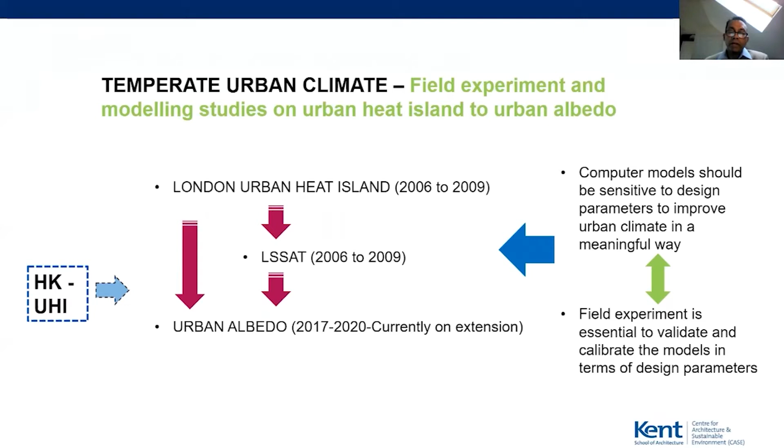Now, the London Urban Heat Island project was funded by EPSRC and it was carried out during 2006-2009. UCL was the principal investigator and Brunel was one of the research partners. I worked for Brunel University as a postdoctoral fellow.

However, the base data for this project came from research work done by Richard Watkins during 1999-2000. He measured the outdoor temperature in various locations of London using the British Museum as the focal point.

He followed a radial path in 8 directions to measure these points, and he used Langley as the reference point, which is shown in green here.

For measurement, he used Tinytag loggers, placed inside an aluminium shield, and these aluminium shields were mounted onto lampposts. He used a special telescopic pole to install the loggers as well as download the data.

Now, we repeated the measurement in these locations during 2007 and 2008. However, we didn't measure in all locations. We measured in 77 locations along the 8 directions.

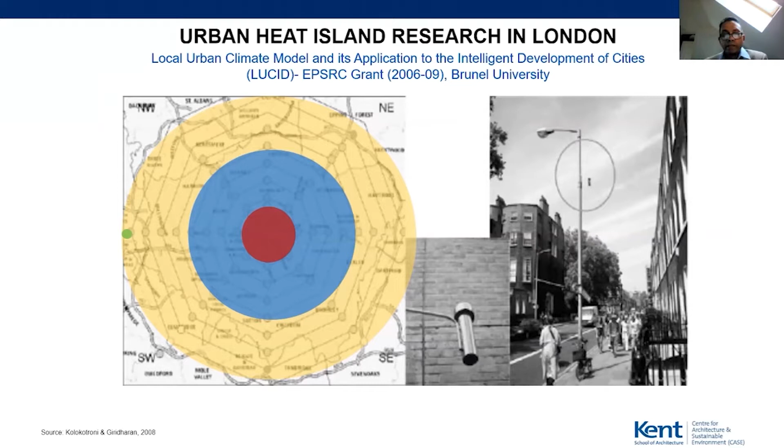For the study, we classified the locations into 3 geographical zones, mainly based on distance from the focal point, which is the British Museum, and density of the setting.

The geographical classifications are core, urban, and semi-urban. Core had 20 measurement points, urban had 24 measurement points, and semi-urban had 33 measurement points.

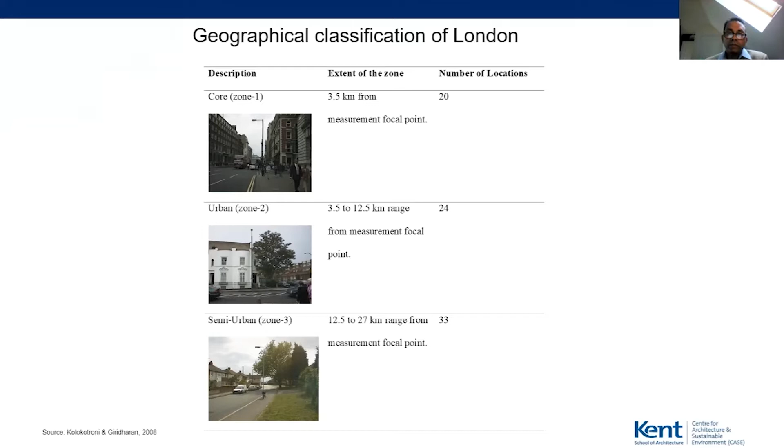For the purpose of analysis, we controlled the data in terms of geography and then disaggregated the data along the sky conditions and analyzed the hourly UHI trends.

In the core area, we found both during day and night there is UHI, however the nighttime UHI is very prominent. In the urban area, the prominency is similar both in day and night.

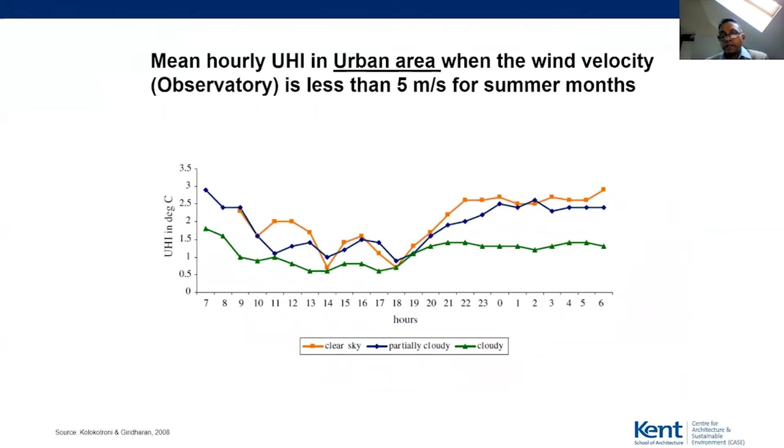But when you move to the semi-urban area, daytime prominency is much more than the nighttime.

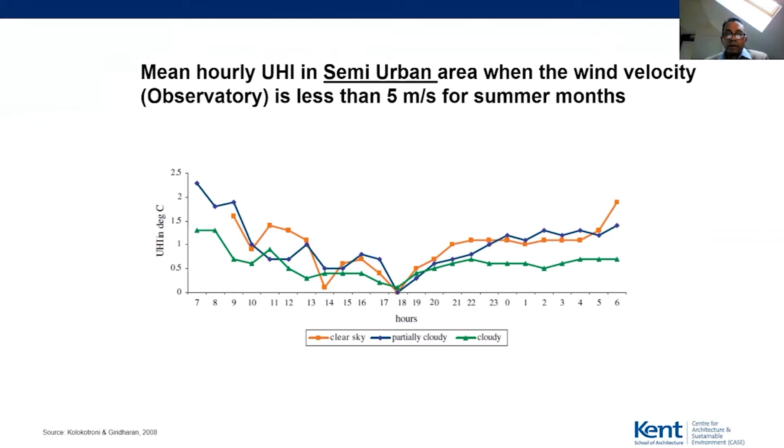Then we studied the changes in the outdoor temperature using on-site variables such as surface albedo, aspect ratio, thermal mass, green density ratio, plan density ratio, and fabric density ratio. For this purpose, we developed regression models controlling the sky conditions.

However, all 6 variables were behaving in line with the acceptable premises.

Then we modeled the nighttime. The R-squared values went up, so the models were very significant, and all 6 variables behaved in line with acceptable premises. This shows the 6 variables were good enough to explain the changes in nighttime.

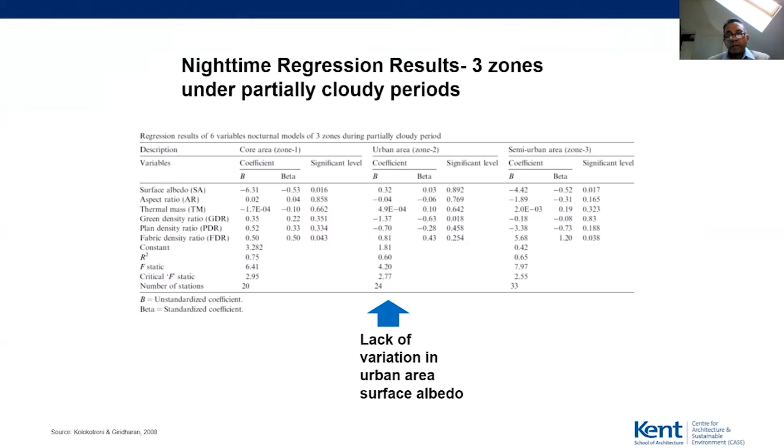Then we controlled the geography and carried out the analysis. Again, we found the nighttime models were very significant and all variables behaved in line with acceptable premises, except surface albedo in urban areas. This is largely due to lack of variation in surface albedo in urban areas, where you'll find mostly asphalt and concrete paving, so that is being reflected in the model.

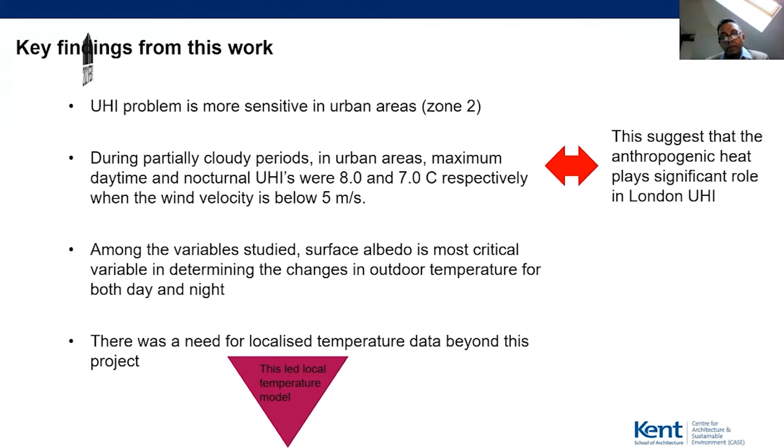Key findings from this work: the UHI problem is more sensitive in urban areas. During partially cloudy periods in urban areas, maximum daytime and nocturnal UHIs were 8 and 7 degrees respectively. This suggests that anthropogenic heat plays a significant role in London's UHI. The most significant on-site variable was surface albedo, and there was a need for localized temperature data beyond this project, which led to the development of London site-specific air temperature models.

For London site-specific air temperature models, we used the artificial neural network technique. Input parameters were air temperature, relative humidity, wind velocity, cloud cover, and solar radiation intensity, based on Heathrow weather data. Another input parameter was the on-site fixed air temperature of a specific site. We used the 2000 data to train these models.

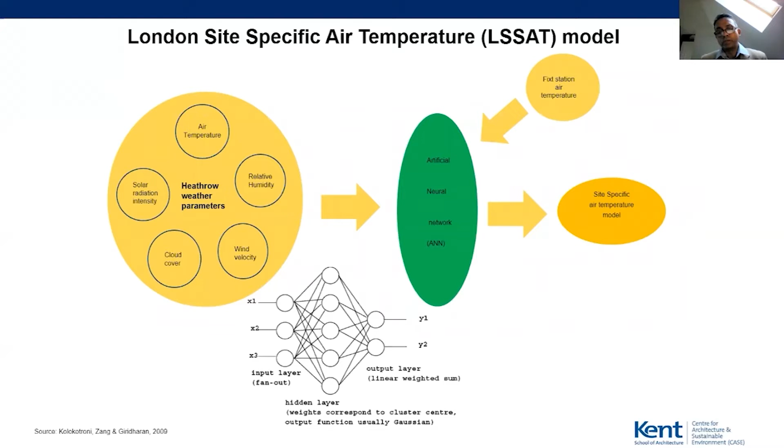The advantage of using a neural network is it has the capacity to randomly select data from the database and train the model, then use the balance data for calibration. For this particular model development, we used 70% of the 1999-2000 data for training and the balance 30% for calibration.

So one of the calibration graphs - we calibrated for almost all the sites, and this is one of the locations in the core area. You can see in 1999, the calibration alignment was very good, and even in 2000 you could see very high calibration.

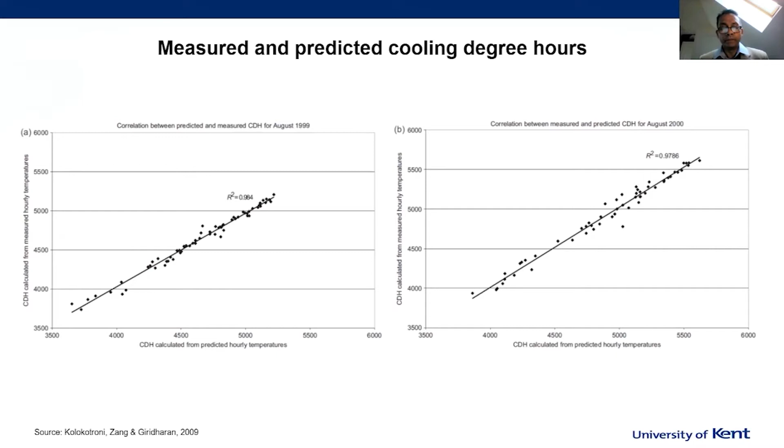We also predicted cooling degree days for 1999 and 2000, and we could see very good alignment. Then we predicted cooling degree days along the radial paths and tried to explain that in terms of on-site variables.

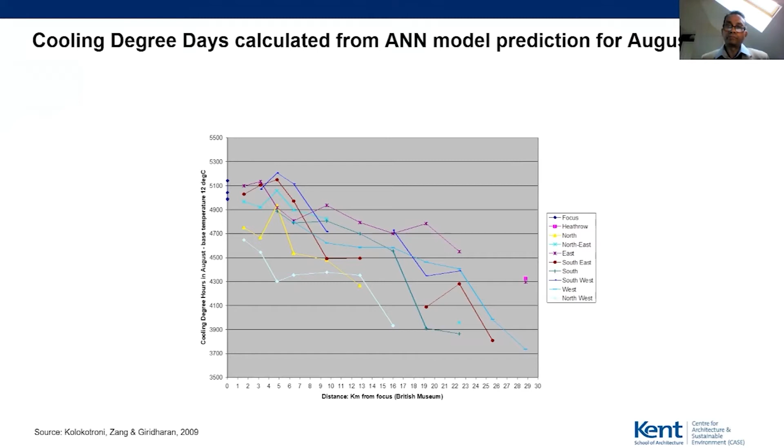The key takeaway from this work: the London site-specific air temperature models were capable of predicting hourly temperature. The accuracy increased for daily values. It is a good tool to work out local heating and cooling degree days. The inaccuracy sets in where urban variations are high, and again, surface albedo was one of those factors.

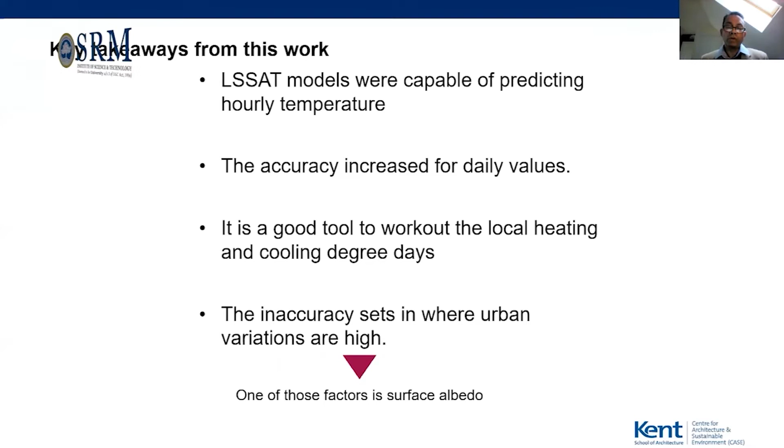These two projects led to the development of urban albedo. Urban albedo is slightly different from surface albedo. Urban albedo is a function of urban geometry, aspect ratio, surface reflectance, and so on.

Originally, this project was developed in 2009 when I was at Brunel, and we submitted to EPSRC. We had good reviews and went up to the last stage. However, we didn't get the funding. Then I moved to Loughborough, and I didn't have time to focus on this project. Then when I moved to Kent, I thought of revising and submitting the proposal.

When I revised the proposal, I took into account the comments given by the reviewers, because we had two excellent reviews for the first submission and one moderate review. So I took all those comments into account and revised the proposal. Especially, we strengthened the proposal in terms of material characterization by bringing in Bala Vaidhyanathan from Loughborough.

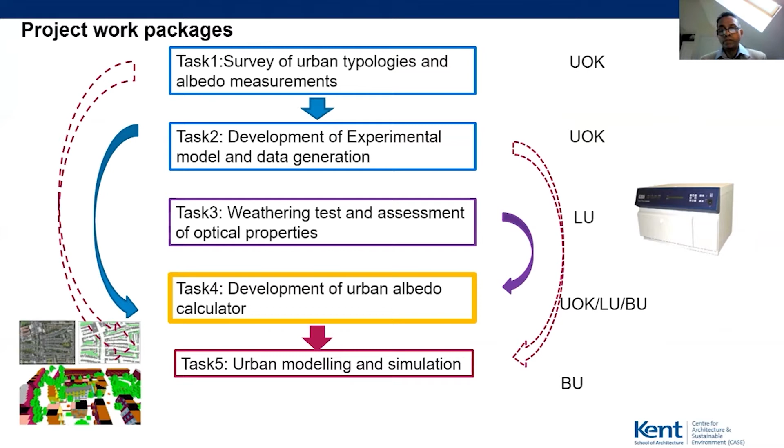Approach for University of Kent component: we carried out a site survey, and then we developed a 1:10 scale model covering a 100-meter radius of a UHI measurement point. So we selected the site from the work done by Richard Watkins. Then we validated the experimental model using the survey information. Then we developed a radiance model of the experimental site, and then we calibrated that model.

And then we subjected that model to various changes in terms of geometry and material. More precisely, we carried out sensitivity analysis to see whether the model is sensitive to various changes. And then the next stage is to develop a radiance model for the actual site, and then simulate various results so that we can generate data to develop indexes and validate the calculator.

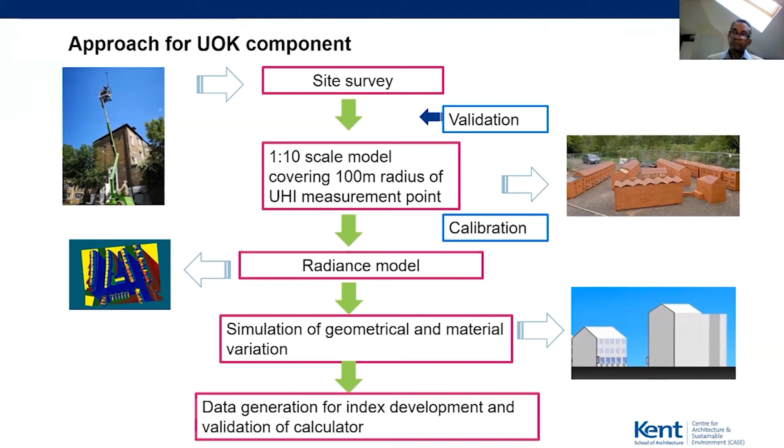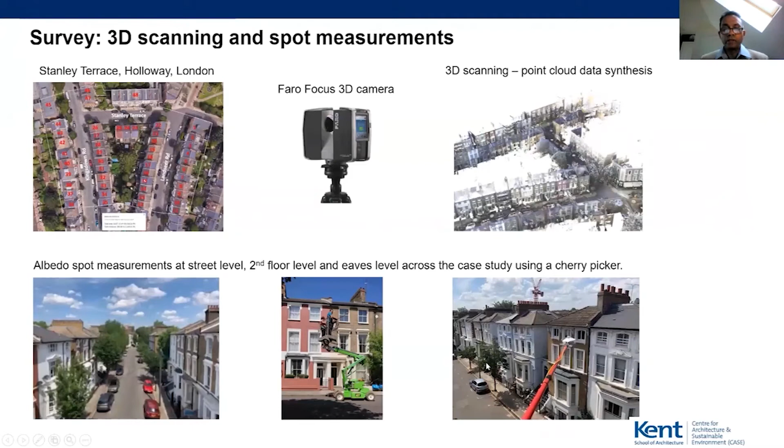The survey and scanning now. The 3D scanning was carried out for the actual site, and it was carried out using a Faro Focus 3D camera. What you see here is the point cloud data of the 3D scanning, and we also surveyed the site using a cherry picker. So we measured albedo at different levels.

Then we developed the experimental model in a northwestern location of University of Kent. We selected a site which was a sump in the past, but currently it is not in operation. The estates kindly agreed to give us that site, which you see on the right top image. However, we didn't realize that we had to get planning clearance to build a model. So all this process took about 6 months. Then eventually we did the setting out, and then we developed the model.

The base structure for the model was made out of plywood. Then we installed the pyranometers. The pyranometer that we use is Hukseflux. Then we are using a Campbell data logger to log the data. And now if you go to Google Earth, you could see the experimental site that you see in this image.

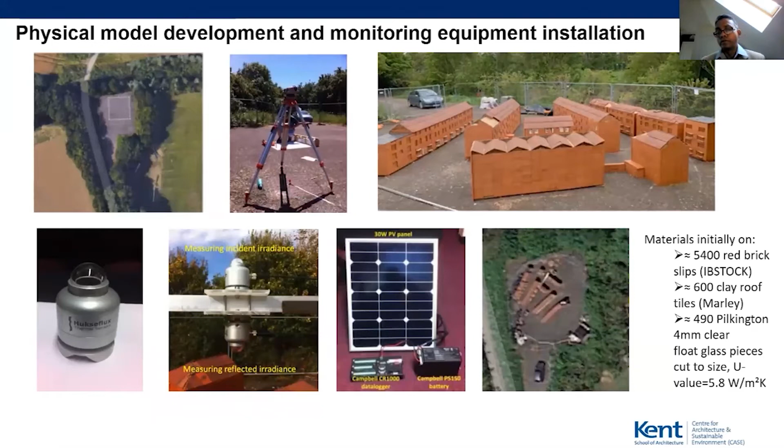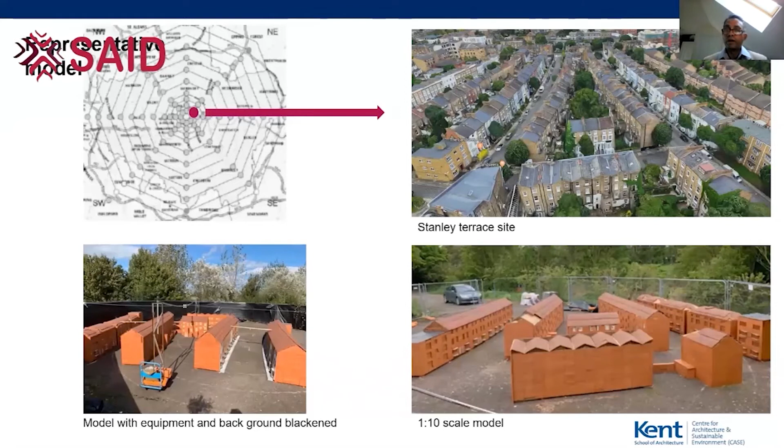This is the model for Stanley Terrace site. The model is reasonably representative of the context. And this is one of the locations which was measured by Richard Watkins for his UHI work. So we selected a site based on that, and we selected this because the variation in geometry is not complex, and second, the height is manageable, so that we can construct a 1:10 model.

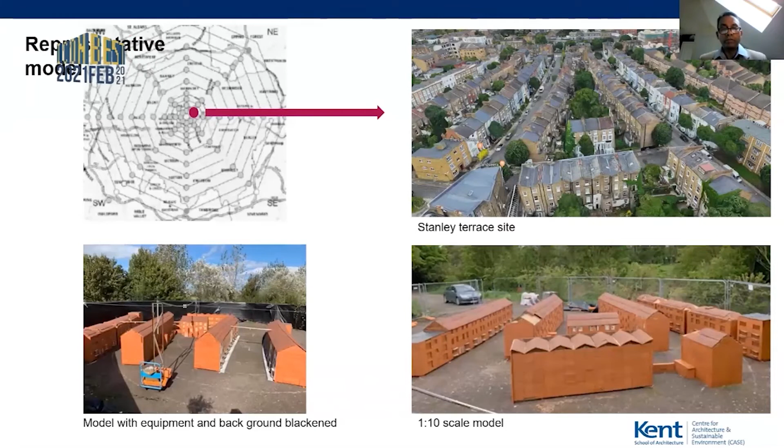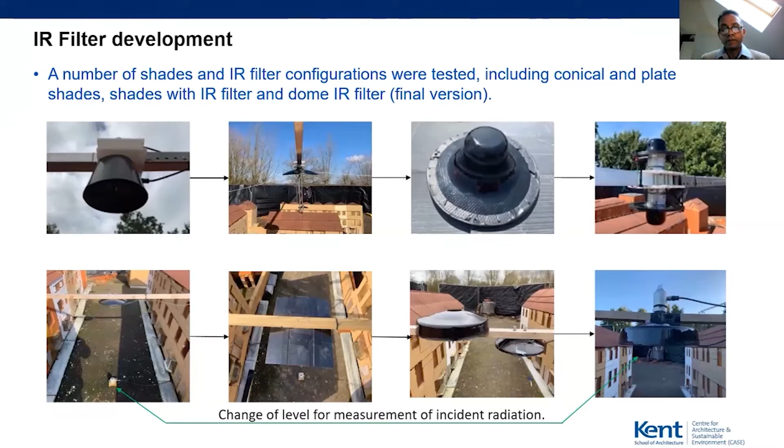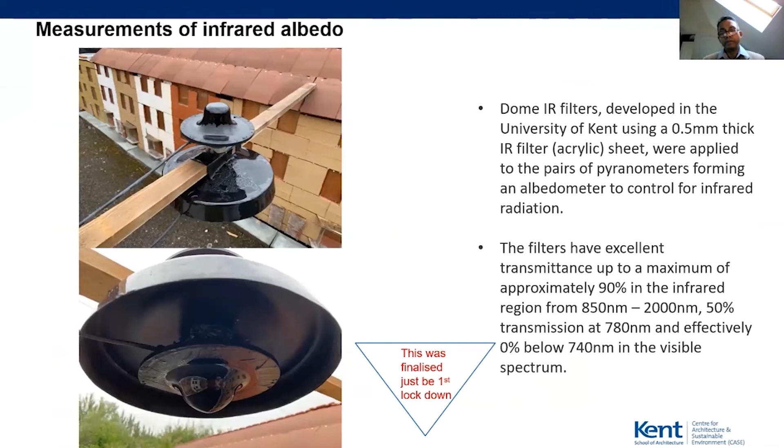The site surrounding was covered with black tarpaulin to avoid low-angle solar radiation getting into the site. Then we also developed an IR filter to assess the IR component of the radiation. The IR filter sheets were flat ones, so we had to mold the filters so that they can be fit to pyranometers. We tried various combinations and finally settled for this arrangement. But by then the first lockdown was introduced, so we couldn't get any data based on this arrangement, but we do have some data on the other options.

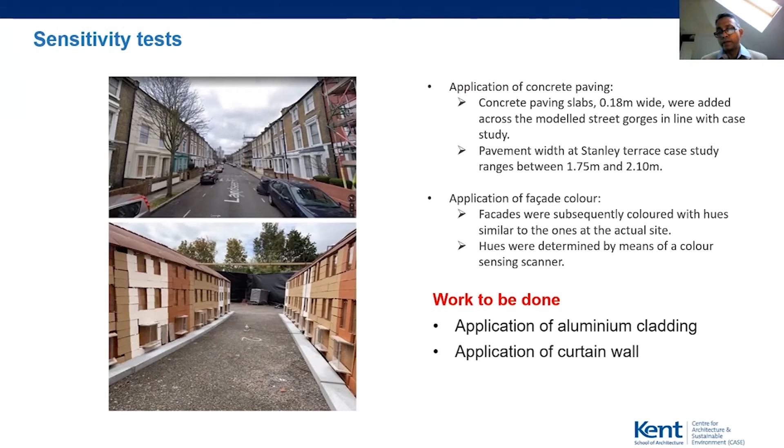Then we carried out sensitivity tests. The first one is based on application of concrete paving, then application of facade color. Then we hope to carry out sensitivity tests based on aluminium cladding and curtain wall. First, we looked at the impact of rainfall on urban albedo, and we could see on rainy days the urban albedo drops by 0.1. It dropped about 50%.

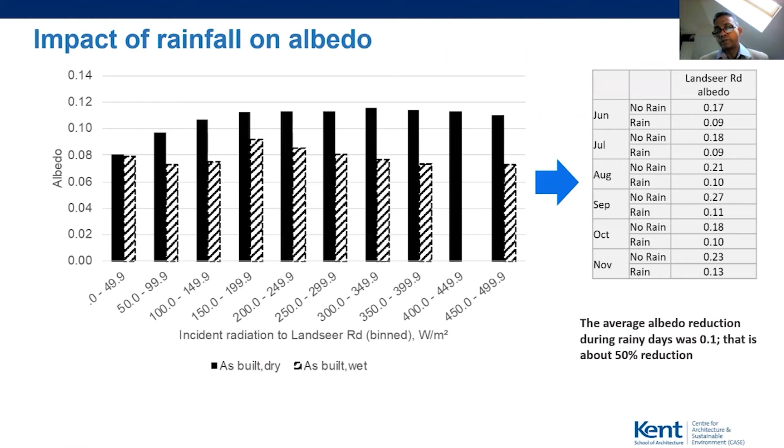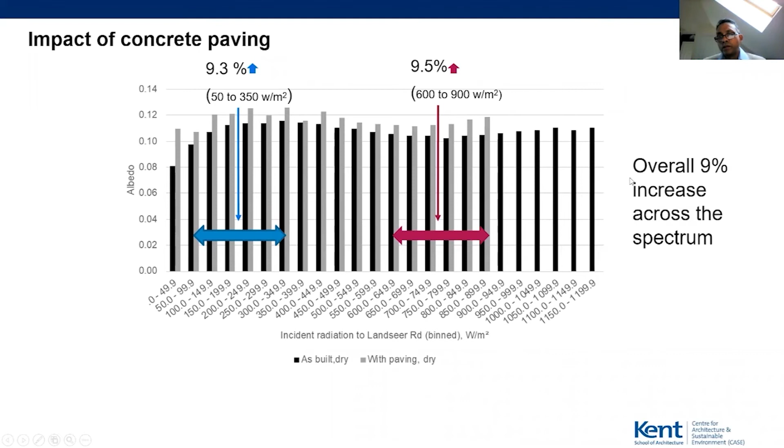Then we looked at the impact of concrete paving. What you see here, the black one is the dry asphalt, and the gray one is with paving. What we could see is that between 50 and 350 watts per meter square, there is an increase of 9.3%, and between 600 and 900 watts per meter square, there's an increase of 9.5%. Overall, the increase is about 9%.

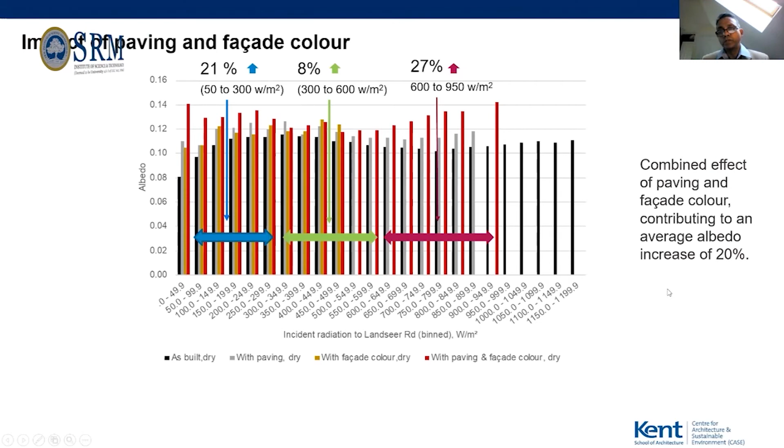Then we looked at the impact of paving and facade color. So the black one is as built, the gray is with paving, the orange one is facade color, and the red one is paving and facade color. In the range of 50 to 300 watts per meter square, the increase is around 20%, between 300 and 600 watts per meter square, the increase is around 8%, and between 600 and 950 watts per meter square, the increase is around 27%. Overall, we could see about 20% increase.

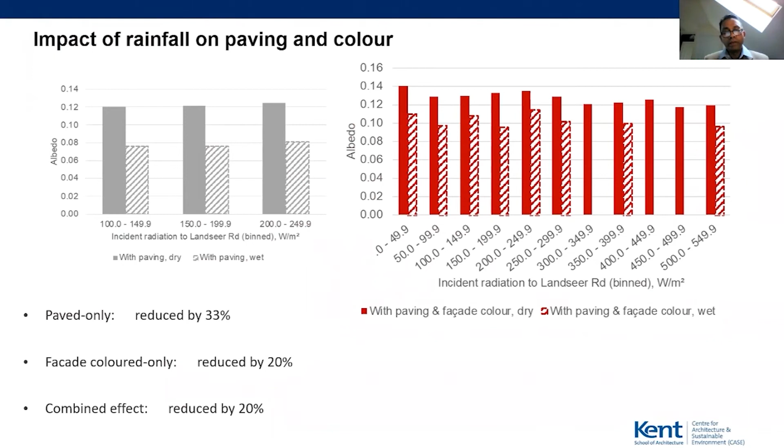Then we looked at the impact of rainfall on paving and color. When we had only paving, the reduction was about 33%. Only facade color, the reduction was about 20%. And the combined effect, the reduction was about 20%.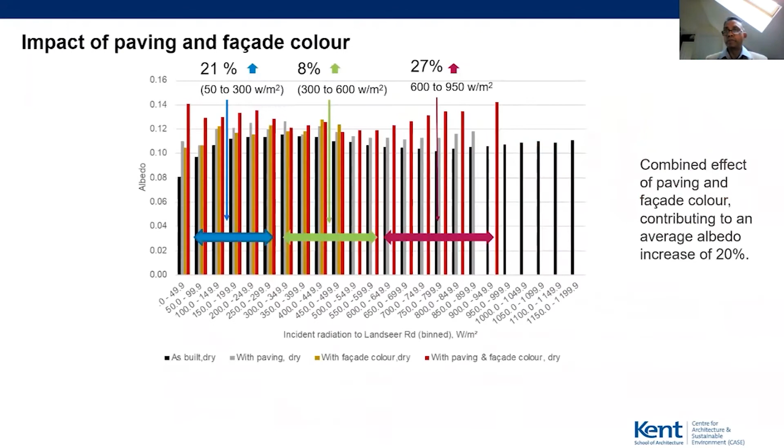Then we also looked at the impact of IR filter by looking at the IR albedo. However, we found some noise in the data, especially at the low angle, which you can see here when the radiation is 0 to 50 watts per meter square. We could see the pyranometer, which was capturing the reflected radiation, was taking some direct radiation as well. So as a result, there was some noise.

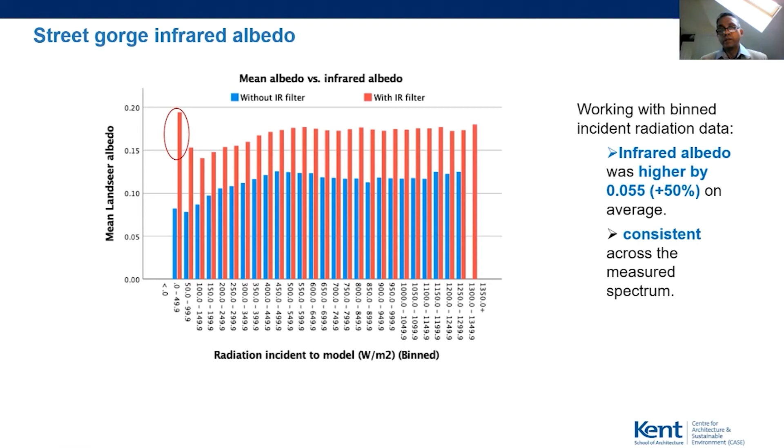So this has been eliminated now. However, we couldn't do any monitoring because of the lockdown. So in the coming months, we hope to get some data on this. In principle, we could see there's about 50% increase in IR albedo.

Then we developed the experimental model in Radiance. For that, we scanned the experimental site, developed a 3D model, and then subjected that to Radiance analysis.

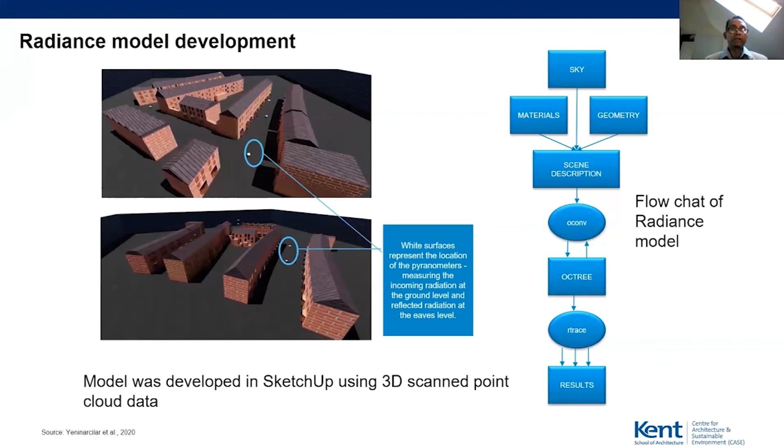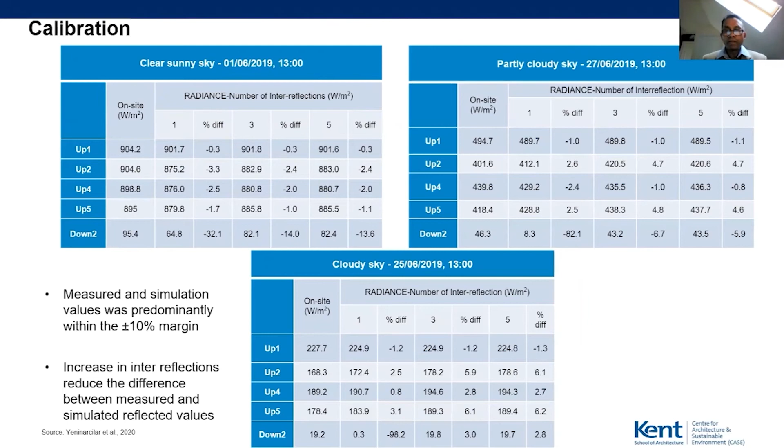So what you see over here is the calibration graphs for different sky conditions: clear sky, partially cloudy, and cloudy. Overall, the error is within plus minus 10%. And we carried out sensitivity analysis. The first sensitivity test was on reflectance. We increased the wall reflectance from 0.3 to 0.6, and we found the albedo increase within the range of 28 to 20% depending on the sky condition.

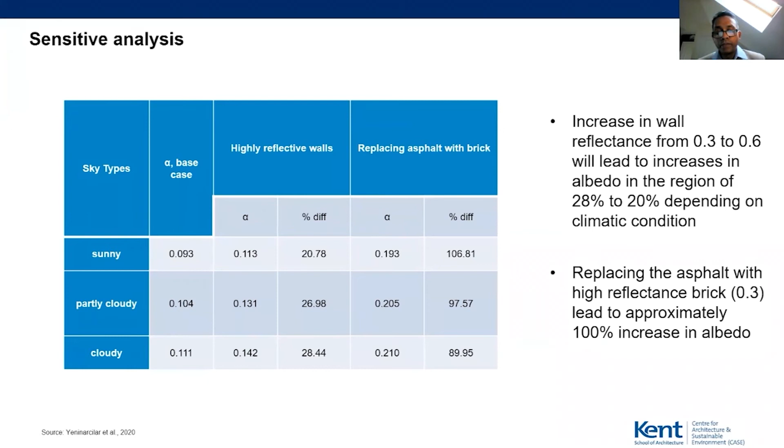Then we replaced the floor on the ground with brick, because originally it's asphalt, so we replaced the asphalt with brick, with a reflection of 0.3, and we found the albedo increased by roughly 100% for all sky conditions.

Then we carried out sensitivity analysis in terms of pavement and flat roof. Again, we found when we introduced the pavement in the Radiance model, the albedo goes up, and for flat roof on sunny days it drops, and then subsequently it increases, in line with the accepted premises. In general, we found in high latitude locations some rays reflected from the slope get into the canyon as well.

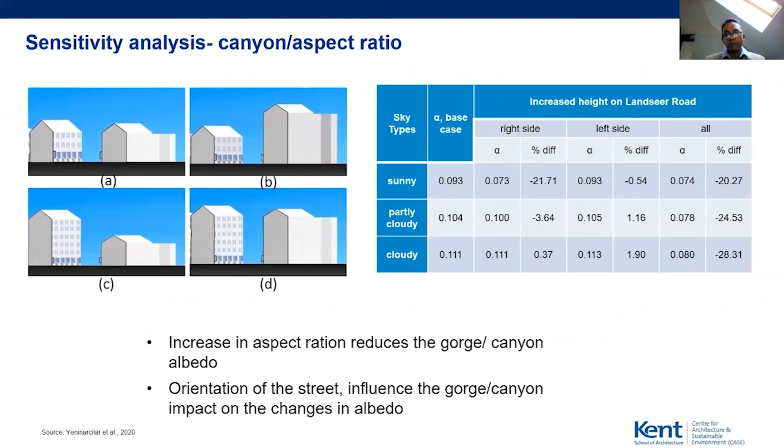Then we carried out sensitivity analysis in terms of canyon aspect ratio. First, we increased the height on the right hand side of the street, then the left hand side, then both sides, and we found the changes in urban albedo in line with the accepted premises. Increasing aspect ratio reduces the gorge canyon albedo. Orientation of the street influences the gorge canyon impact on the changes in albedo. That is, when the orientation changes, the impact you get from gorge canyon albedo also changes.

Then we wanted to enhance calibration. So we carried out sensitivity analysis in terms of specularity and location of the pyranometer. In initial studies, the outgoing pyranometer was at the eaves level, the incoming at the ground level. And we found at certain angles, the outgoing has much more radiation than the incoming one. This is because the outgoing one was getting direct radiation as well as reflection from roofs and so on. So as a result, we were getting unreasonable albedo values.

So we moved both pyranometers, incoming as well as outgoing, to the eave level. Then we also changed the specularity level of the material.

For example, we changed the red brick specularity to 0.015. Initially, when we carried out the calibration, we had specularity as 0. So when we changed that specularity, we found the alignments were much better, and the error also reduced substantially. But we couldn't reduce the error reasonably well in overcast conditions, because representing the overcast condition in Radiance is a challenge. So we are still working on that.

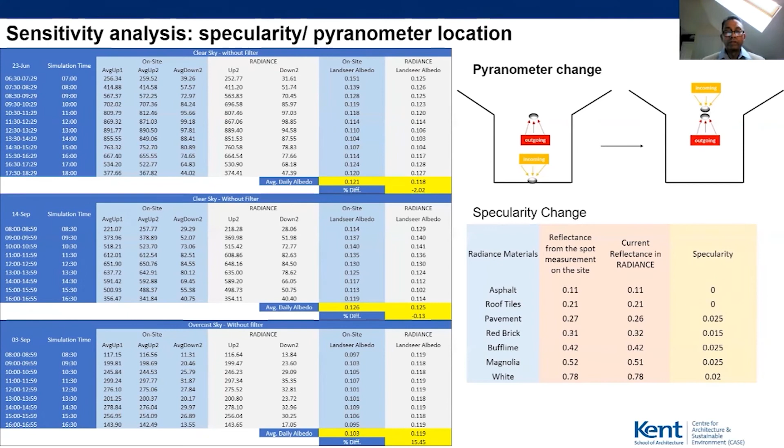Next, now we have built the experimental site model in Radiance and modeled it. And next, we are going to build the actual site model in Radiance. That is, we are going to take the point cloud data of the actual site and build a Radiance model and then validate that model against the experimental model, and then we'll carry out changes in that actual model to generate data. And these will be fed into the urban calculator framework.

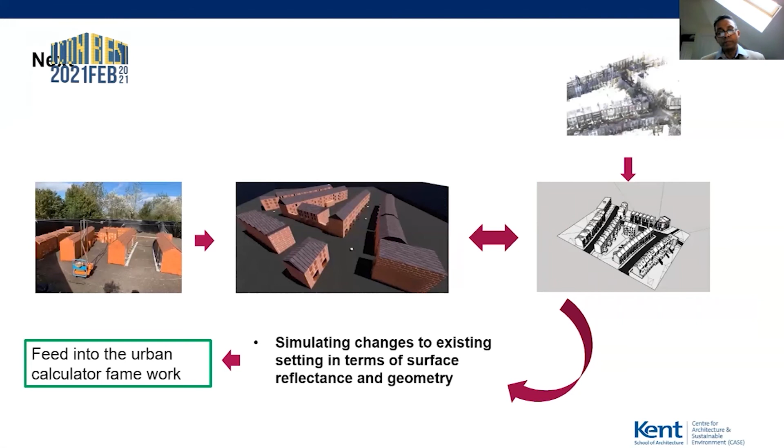Now we have a calculator framework, but it needs much more refinement, and for that we need a lot of measured data. Since the lockdown came in, we couldn't get the necessary data and refine the calculator. Hopefully in the coming months we will get that data and refine the calculator.

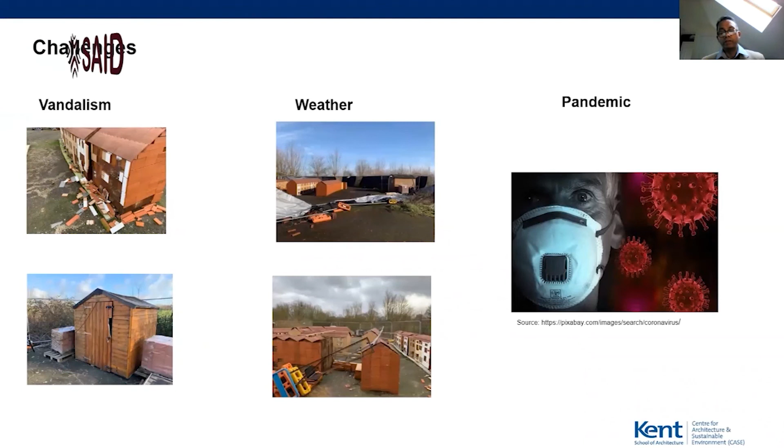Of course, we had a lot of challenges. First is vandalism. Twice the site was vandalized, and then we rectified and put the site into operation. And there were quite a few times weather-related damage. So we were able to rectify and put the site into operation. And finally, the pandemic. So since last March, we couldn't do any effective experimental work. We hope in the coming months, from March onwards up to July, we'll be able to do some good experimental work, because we have got an extension.